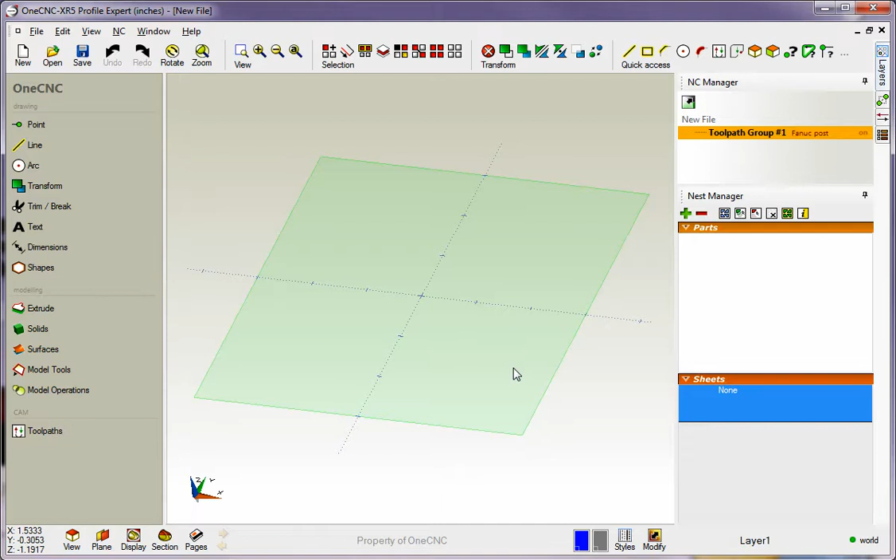Hello, this is Patrick with OneCNC West. In this video we're going to take a look at some of the manufacturing capability provided by OneCNC XR5 Profile Expert. I mentioned earlier that the profile software is dedicated to sheet metal, but you're not limited to sheet metal. This can also be used for plastic and wood and so on.

To begin with, why don't we sketch a couple of shapes? I'm going to head up to our line tool and make a rectangle. Of course you can use dimensions and coordinates, but I'm just sketching a couple of shapes to get us up and going. I'm going to create a polygon. Why don't we put that right there, and I'll drag that out, and that looks good.

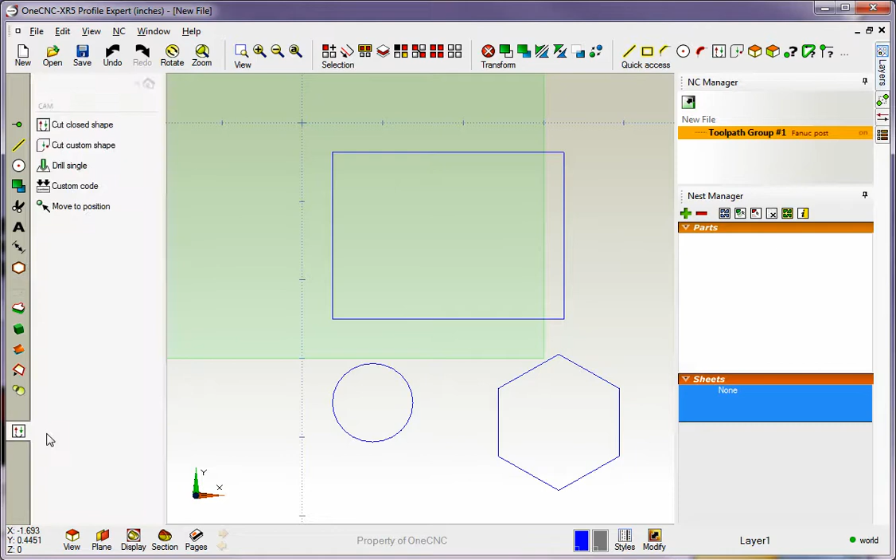At this point we could start to machine these just by heading over to the main toolbar, selecting our toolpath option, and then we could go to work. But instead, I'd like to show you how we can nest parts within OneCNC. You have the ability to manually nest and to automatically nest.

To begin with, we need to add our parts to the nest manager. This is real simple - you just take your cursor, click on the plus sign, and left click your shape. Once you do that, you'll want to fill out your different parameters - there's parameters for quantity, nest angles, lead in and lead out options, and so on. I already have a quantity of 400, and I'll click OK, and you can see this gets added to our nest manager.

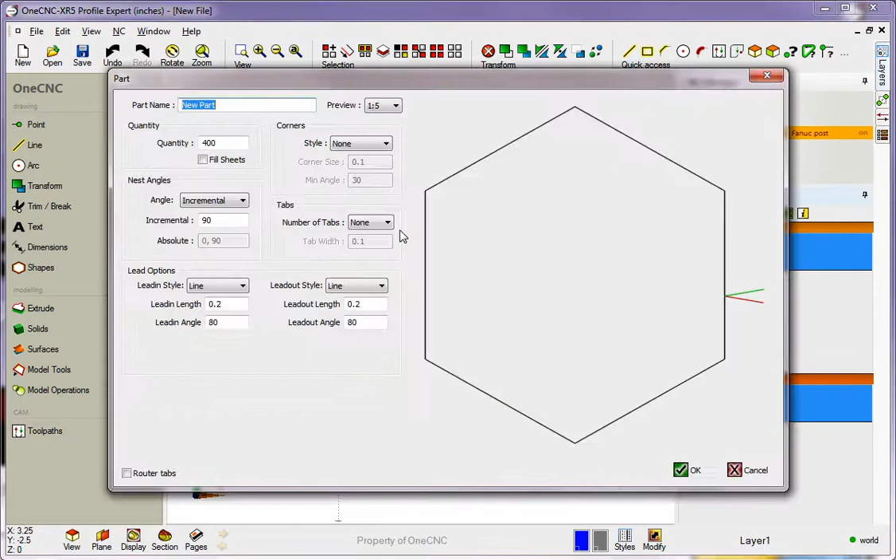Let's repeat the process for the remaining two shapes. I'll left click, accept the defaults, and click OK. Let's add that circle now - we're going to left click on that, right click, here's the parameters, and we'll click OK. So at this point, the parts have not been nested yet, but they've been added to our nest manager. All the pertinent information is stored there.

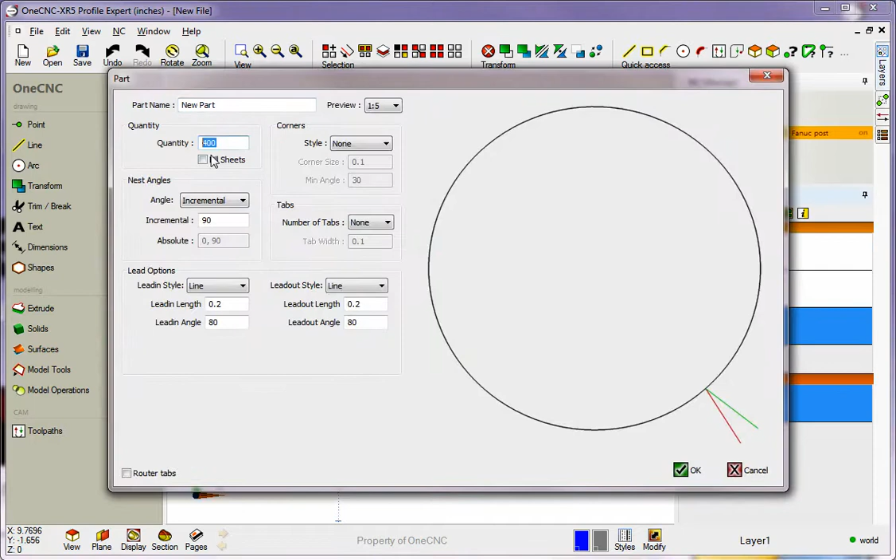Now if you want to make an edit, it's real simple - just take your cursor, left-hand mouse click twice, and then make whatever changes you'd like. I'll put in 300, for example, for the quantity.

Now to nest this, I'm going to zoom out just a little bit so we can watch it happen. It looks good. We're going to choose this option right here, which is called Nest Parts to Sheet. This is where we fill out our sheet information. Once we've done that, we click OK, and then OneCNC starts to nest the parts.

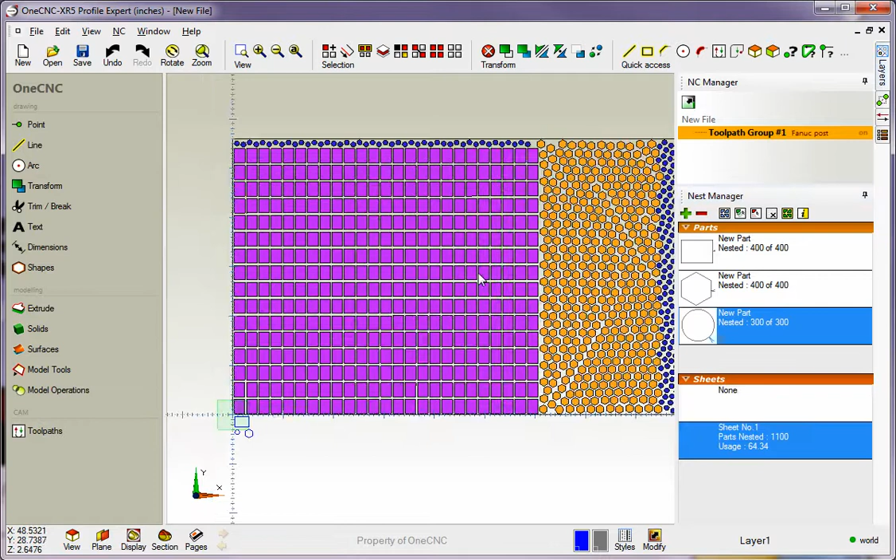Real simple and quick. Now at this point we can manufacture the parts. One option we could use is this one right here called Cut the Nested Parts. You just fill in your pertinent data and then click Finish.

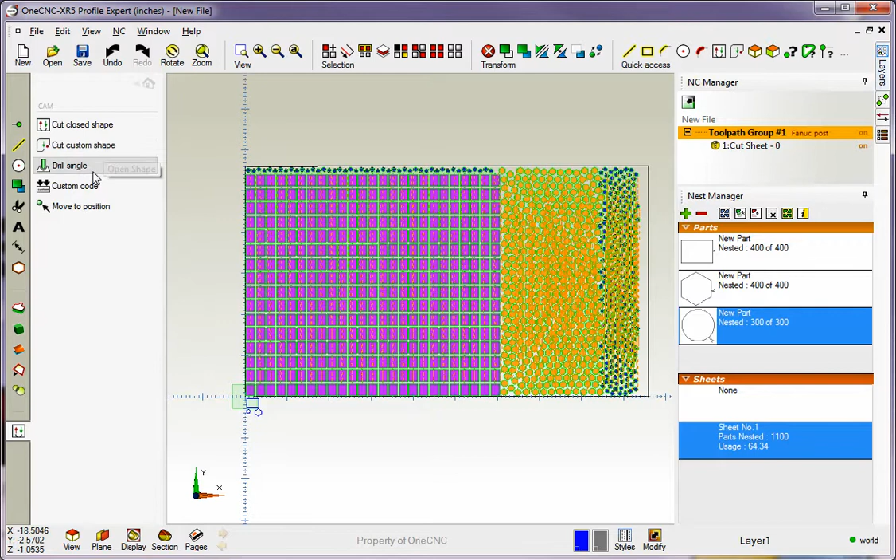Now, of course, you don't have to machine nested parts. You can also machine parts individually, and there's lots of toolpath options that you can use for machining. You've got cut close, cut open, drilled, and you also have custom code as well.

Now another new item with the XR5 is our brand new job sheet. We've always had job sheets, but we've reformatted that. I'd like to show you that right now. We're going to right click up here, go to Post Group, and select Job Sheet. This gives us a preview of the job sheet, and it will list all the different operations down here.

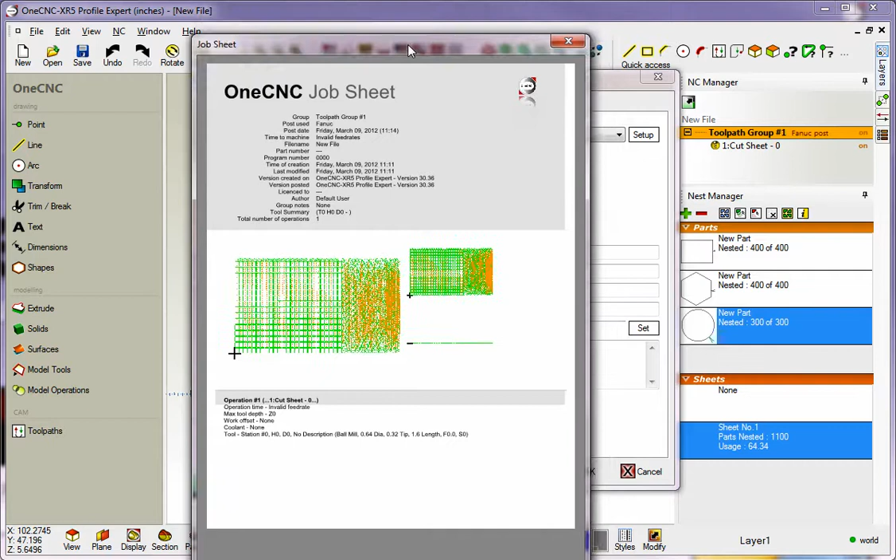I only have one operation. It gives you a nice overview of the sheet and where the datum is. At this point we can print or save. I'm going to save - the nice thing now is that this gets saved as a PDF file.

I already have a PDF file on my desktop. I'm just going to overwrite that by double clicking. That looks good. Now let's take a look at the PDF file - I'm going to open that up for you, and here is the job sheet. You can see there's a nice overview of the part, and all your operations get listed at the bottom there. It's very, very nice.

Another thing I should point out within XR5 is the Profile is now available in 3 different systems. There is a Profile Express, which is a bare bones system that doesn't include solids and surfaces. There's also a Profile Professional, which does include the ability to work with solids and surfaces. And then there is also the Profile Expert, which also includes the Pages option, which quickly allows you to create blueprints from solids and surfaces.